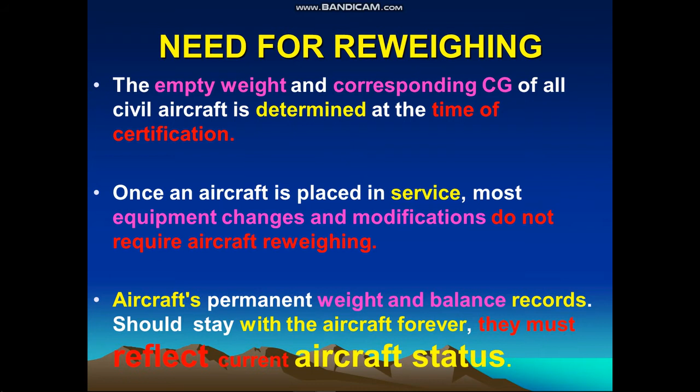Today we will understand the need for reweighing the aircraft. The empty weight and corresponding CG of all civil aircraft is determined at the time of certification. Once an aircraft is placed in service, most equipment changes and modifications don't require aircraft reweighing. Aircraft's permanent weight and balance records should stay with the aircraft forever. They must reflect current aircraft status.

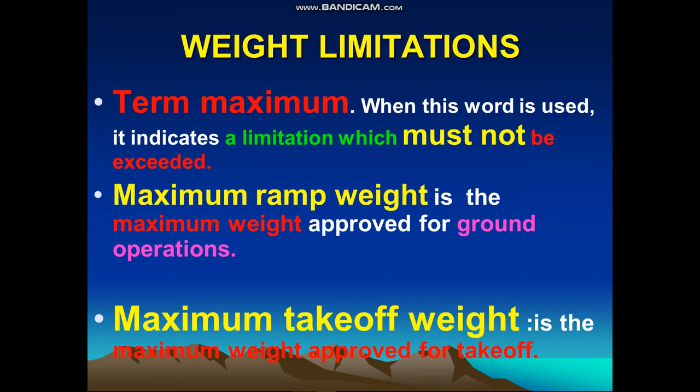Weight limitations. Term maximum: when this word is used, it indicates a limitation which must not be exceeded. Maximum ramp weight is the maximum weight approved for the ground operation. Maximum takeoff weight is the maximum weight approved for takeoff. Maximum landing weight is the allowable weight at which an aircraft can be landed.

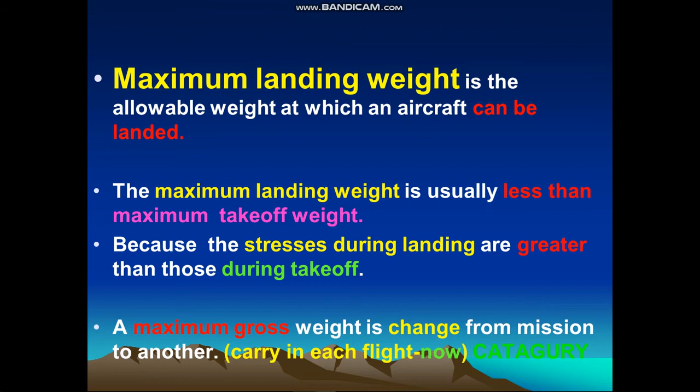The maximum landing weight is usually less than the maximum takeoff weight. Why? Because of the fuel consumption during flight, and also because the stresses during landing are greater than those during takeoff. A maximum gross weight changes from one mission to another. Operating an aircraft above its maximum weight could result in structural deformation or failure.

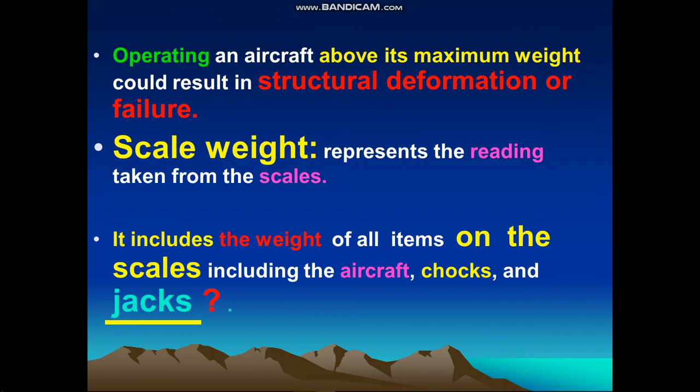Now we will talk about the tare weight. It includes the weight of all items on the scales that are not part of the aircraft, such as jacks, blocks, and chocks. The weight of these items must be deducted from the scale weight to obtain the actual or net weight.

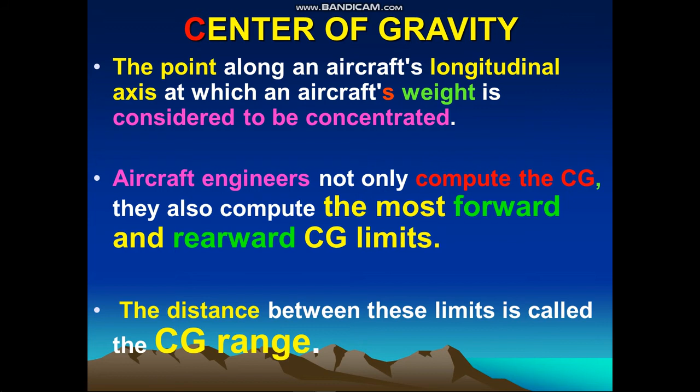Center of gravity design limits. It is the responsibility of the pilot to know before each flight that the aircraft is properly loaded, it doesn't exceed the allowable gross weight, and the CG is within the allowable range.

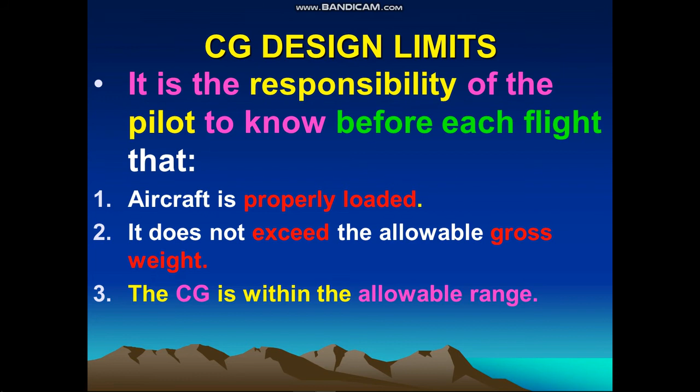Aircraft loading aspects. The weight of an aircraft changes during its operational life as equipment is added or removed and as repairs are made. It is the responsibility of the aviation maintenance technician to see that the permanent aircraft records reflect those changes.

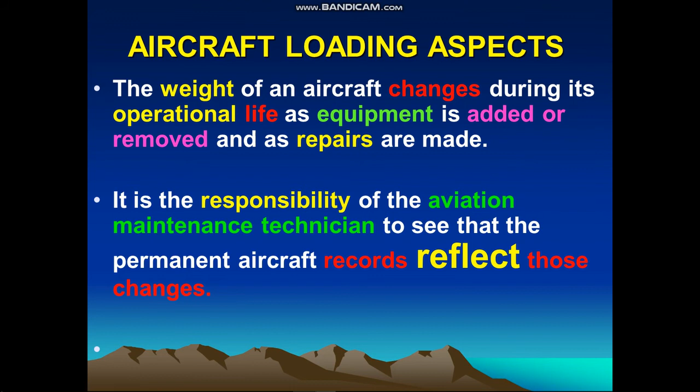The fuel tanks in most small training aircraft are located in the wing, while the seats and baggage compartments are located directly below the wing. In this configuration, it is not likely that an aircraft will be loaded in such a way that the CG falls outside its allowable range.

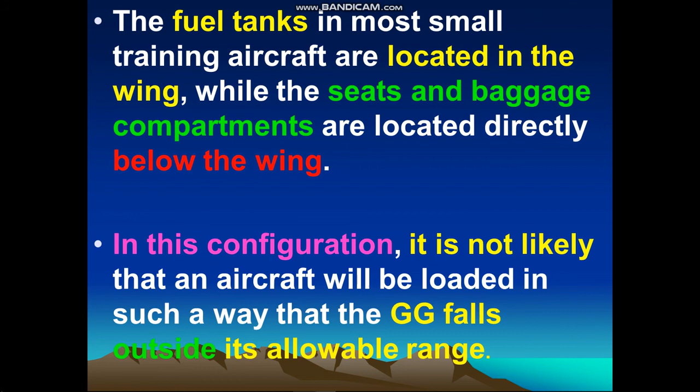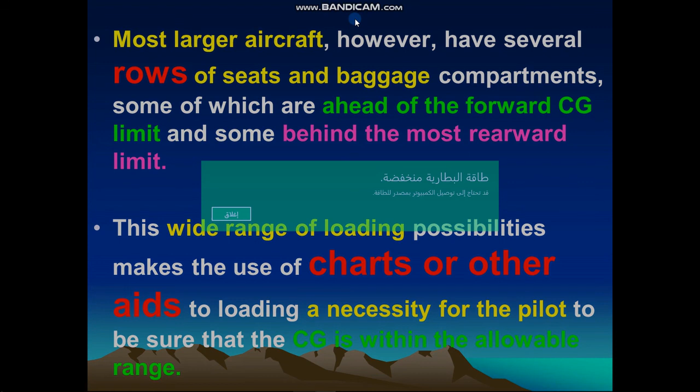Most large aircraft, however, have several rows of seats and baggage compartments, some of which are ahead of the forward CG limit and some behind the most rearward limit. This wide range of loading possibilities makes the use of charts or other loading aids a necessity for the pilot to be sure that the CG is within the allowable range.